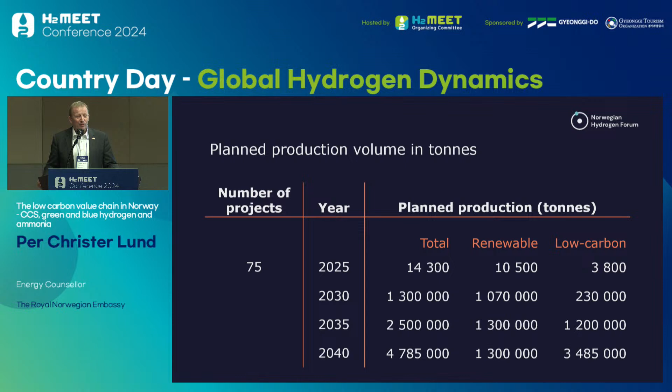And this is the elements that we can bring to the market. Our ambition is to be able to produce and deliver a substantial amount of green and blue hydrogen, primarily to the European market, because that is closer. And Europe is screaming for clean energy by pipeline or by ship or by whatever means.

Not only a class, but also an advisor, and they do testing, etc. All will be presenting later today. Just a few examples of projects that we have ongoing.

Yara is the global second largest producer of fertilizer in the world, and of course ammonia is the main constituent of fertilizer. They have a very ambitious plan to go green on their ammonia production as well, from green ammonia. This is one example: 400,000 tons per year of green ammonia in Norway.

Moving forward with that, they are about to build up a similar facility in Pilbara, Australia, where the export market for that green ammonia is Korea, or Japan, or any other off-taker in Asia. So this is a very strong driver for that ammonia production side.

The other one we have is in the very north of Norway. One of the challenges in the long-stretched country of Norway is transmission capacity, so quite a bit of the green electricity that we have now from hydropower, but also wind, is captured. One way of utilizing that is to produce ammonia or hydrogen for export to the continent. It's a far distance, so ship transport is key for this one.

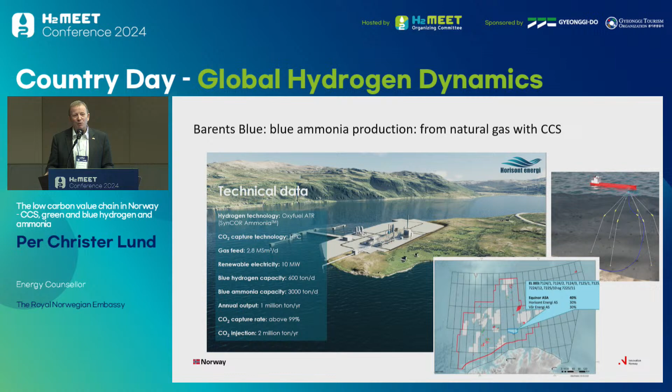This project was approved by the government last year, and it is a combination of producing ammonia from natural gas combined with carbon capture and storage back into an aquifer in the north of Norway. This is in the polar region, so there are many challenges when it comes to ship transport to facilitate operations in a tough environment.

We are also looking at the downstream side, replacing fossil fuels or reducing agents in our steel, cement, petrochemical, and other industries with greener fuels or greener ammonia. So this is one example: steel or iron production using green or blue hydrogen as the reduction agent. This is one of the projects there as well.

And of course the transport sector is important, the maritime transport first. Land-based transport may be coming a bit later, it looks like the wave of electrical cars in Norway has taken over from hydrogen cars. But for the maritime sector we have many initiatives, for example the Hydra ferry, which is the world's first full hydrogen-fueled car ferry.

And we have the Topeka project as well, which is a combination of hydrogen-fueled hydrogen transport vessels by Wilhelmsen. This Topeka project is also helping to distribute hydrogen, small-scale distribution along the long coastline of Norway to various sites. So much activity in that space.

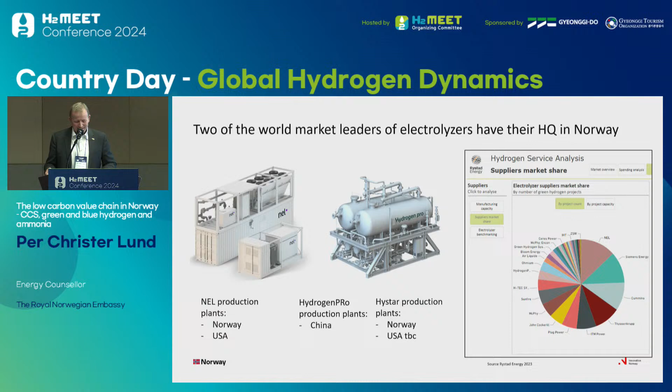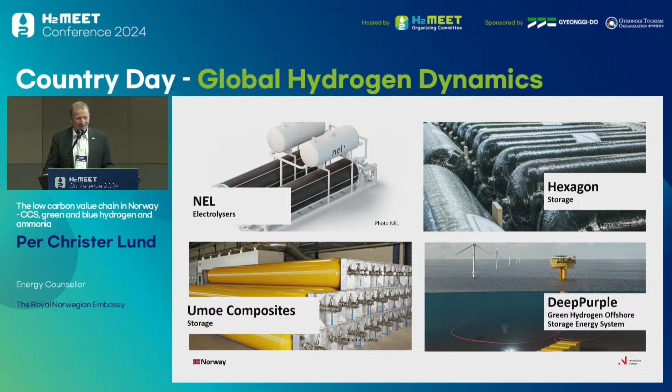We have storage, Umoe Composites is here, Hexagon, Lattice - sorry I didn't put that in, but he will present another concept for hydrogen storage. And then we have the CCS part.

I'll spend the last 5 minutes or so, a little bit more on the CCS part, because that is an essential part for Norway to be able to convert our natural gas into blue hydrogen - capture the carbon from the natural gas and then re-inject it into the seabed. Norway has been a leader on CCS projects since back in the 1990s. You probably heard about the Sleipner project, which was the world's first million ton per year re-injection into a saline aquifer under the seabed. And we have a number of projects now.

I'll go a little bit deeper into this one. So we are again building up not only a national value chain for carbon capture and storage, but actually a European and potentially a global one. That is, on the capture side, we are pushing forward with capture technologies from fossil fuel plants - coal power stations, natural gas power stations, oil power stations, etc.

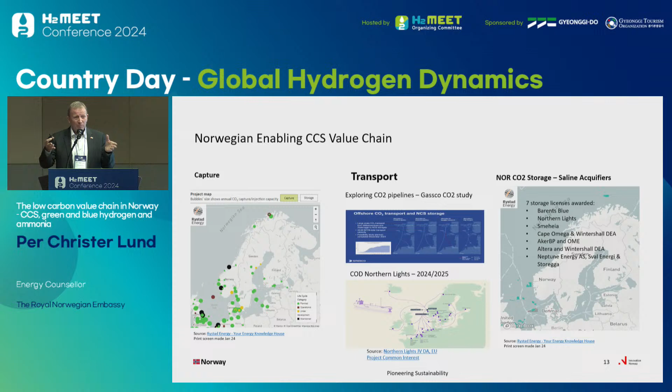But also cement industry, from waste facilities, etc. Transport on ships - we are also leading on CO2 building and contracting CO2 transport vessels. And then, of course, the major project in Norway now, the Northern Lights project, is about being a receiving terminal, not only for Norwegian CO2, but also from Europe, and then re-injecting it permanently under the seabed in the Northern Sea.

I don't have time to look into this. I'm happy to share this slide, of course, and talking. But we started in 1996, so we are leading in this CCS space.

We have one of the most advanced technology centers in the world when it comes to testing of large-scale capture technology, amine-based, at Mongstad, where we have a number of companies from the Middle East, even South Africa. Japanese have been there as a partner on developing the new capture technology - amine-based, ammonia-based, chilled ammonia-based, membrane, etc. So we have built up a very advanced center for this in Norway as well.

And then, of course, it's the Northern Lights project that actually started or is about to be activated now. The first customer for this - let's call it the CO2, this is a receiving terminal for waste, for CO2. One of the first customers is actually Yara. Yara is capturing CO2 from its ammonia plant in Netherlands.

The Northern Lights project has contracted 3 vessels to transport it from Netherlands to this receiving station. And then it will be treated and then re-injected or injected into a saline aquifer under the seabed in the Northern Sea.

Ambition large: 1.5 million tons starting this year, or building up, and then maybe up to 4 million tons per year. So we have the ambition. Norway has the ambition to be the waste receiving station of Europe.

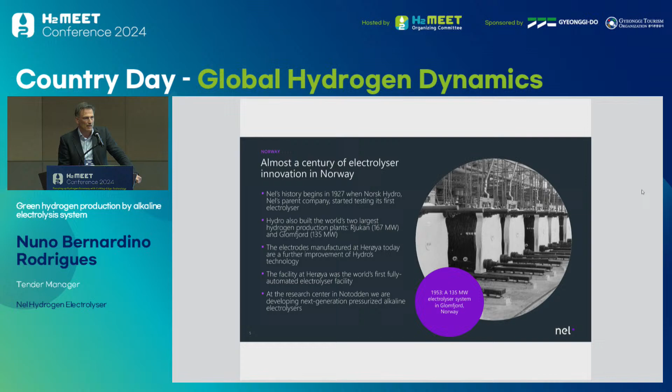So today in Norway, in Notodden, we still have a large research center where we are developing not only the next generation of atmospheric alkaline, but also the next generation of pressurized alkaline.

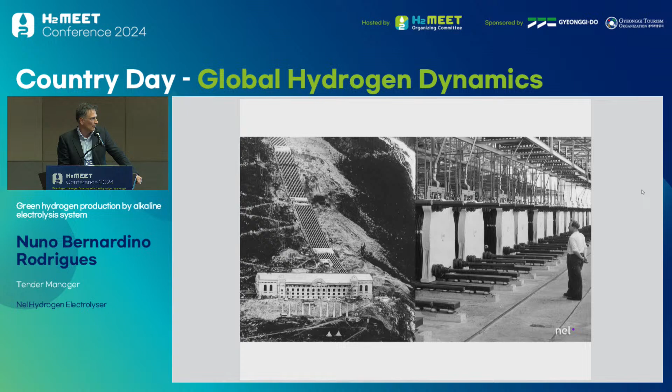So what happened at Rjukan? Rjukan is a quite famous place in Norway - I know some of you have been there. Rjukan was actually a 167 megawatt plant.

There were 6 floors of electrolyzers, something today we still struggle to build 2 floors of. Out of this came H2 for ammonia and fertilizers, and this was actually operating for more than 40 years. It is amazing how technology from the 1920s was used to build something like this.

And while today we are still looking into ways of doing this again. This was also a very famous site during the Second World War. Initially it was being used to produce heavy water.

So in the basement, we were producing heavy water that was being sent to France. This was actually a quite secret program driven to produce a nuclear atomic bomb.

What happens next? During the Second World War, Germany invades Norway and takes over this site. So they start using that heavy water and sending it to Germany.

So there was a strong program from the Allies to bomb this place, but it is in a very steep valley, so it was very difficult to reach. What they did was take a few very, very brave people and drop them in, and they had to travel several days until they reached the site and put a bomb in the basement.

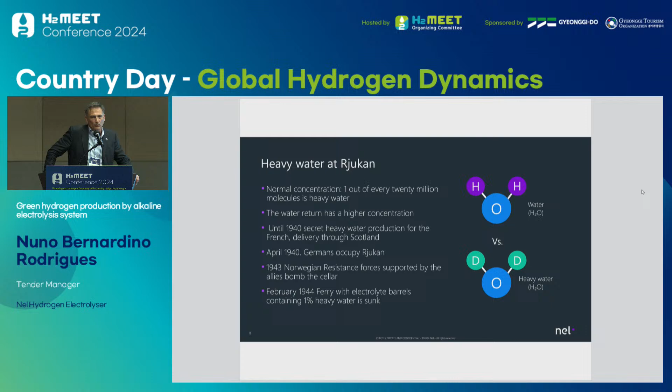And what they were doing in Rjukan, they were processing the water several times until they achieved the concentration required. It was a long process, and a lot of water was being shipped, which doesn't make much sense, but it was shipped all the way to Germany. After the bombing, there was still a lot of water to be sent to Germany, so the Allies also sabotaged the transportation. They actually sunk a boat not far from the Rjukan site, in a big lake, full of that water.

That building was actually demolished in '77, which is unfortunate, because I think we could still learn quite a few tricks from the building itself. But it's very interesting to understand how technology from the late 1920s was able to produce something that worked for 40 years.

One of the other biggest plant productions was in Glomfjord, in north of Norway. It's actually 135 megawatts, and it worked from the 50s up to 1988. And do you know why it stopped? Why did they stop producing hydrogen for ammonia in '88? Any guess?

Because a decade earlier, they started using natural gas. So Norway was producing green ammonia for decades, and then it stopped, so we went backwards. Of course, we know that the process is cheaper using natural gas. I think now we need to go back to the old times and use green energy to produce, to replace the gas.

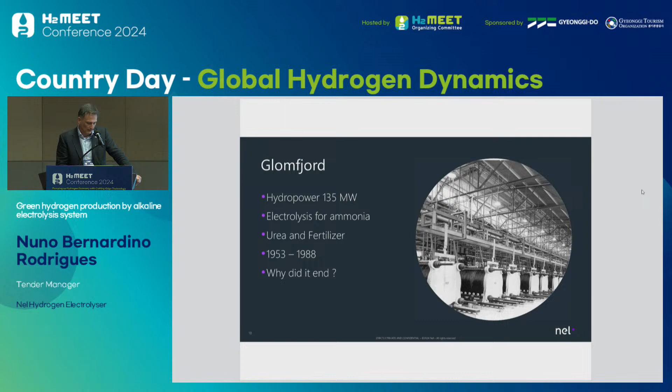I continue to click on the wrong button.

This is like, okay. I think it's important in linking to the old times that we need to remember the why. Our mission is to fight climate change in hard-to-abate sectors. We see that as a priority. There are many utilizations on the chemical and processing side for hydrogen, and it's really important to start with those.

So when Nel, or Nel's parent company, started, the objective was to produce fertilizer for a hungry world. But now we face a new challenge.

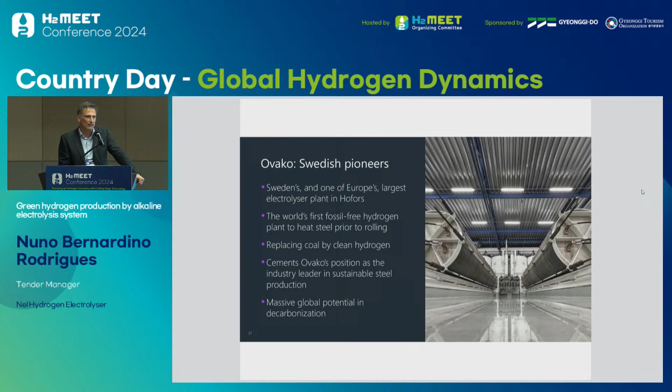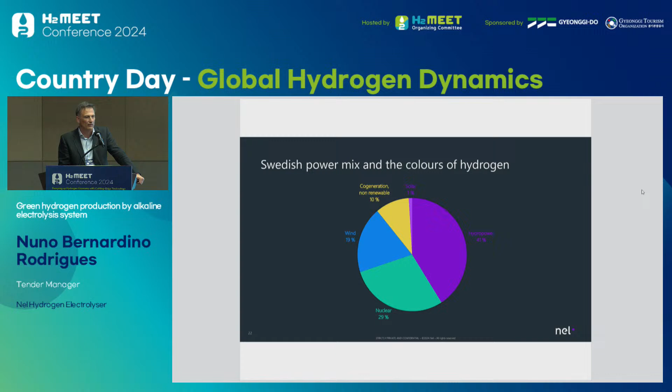Besides Ovako, they have the first fossil-free hydrogen plant, and they are planning to expand this. The steel industry by itself has a massive potential for decarbonization. Ovako is connected to the grid, and like in Norway, in Sweden the grid also has renewable sources, so even when using grid electricity they are still very much on the green side. We actually have a 25 megawatt facility in Sarawak, OCIM. What's very interesting is they sit on the other side of the world from Norway, but the technology is so reliable that they take care of the maintenance themselves, and we never heard from them again. It's very good though.

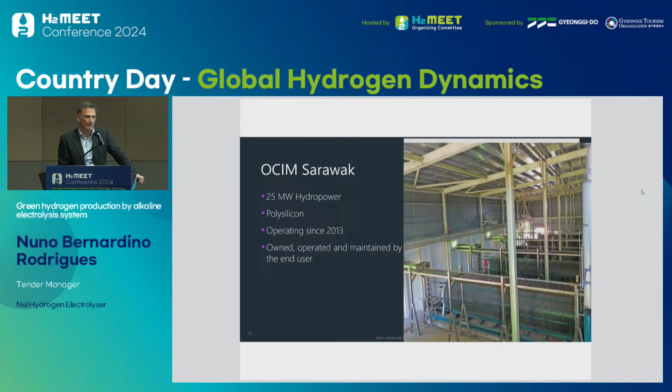Yeah, it's bad for the aftermarket though. We don't sell much aftermarket with these guys.

It's worth mentioning we have an ongoing project with a Korean partner, Samsung C&T. It's our first project in Korea, and we are very happy to partner with Samsung C&T on this. We will work together to make this a success, so we have high expectations, and hopefully this will be a starting point for many other opportunities in Korea and with Korean partners.

We also have projects in the US. We have H2OK ongoing, actually the largest project we are executing right now.

So let's summarize. Here you have a picture of the factory, I couldn't put many pictures since they need to be sanctioned by legal and corporate, so it's not the best picture, but it's what I could share with you guys. I think the key point on this slide is that we have a very reliable technology, and we are building that technology for the future. We currently have two platforms, PEM and alkaline, and we are developing a third one. We don't know which will be best for the future; what we know is we'll push all three in the same way and let the market decide. There will be some more advantageous in certain situations, and some will be the winners over the others.

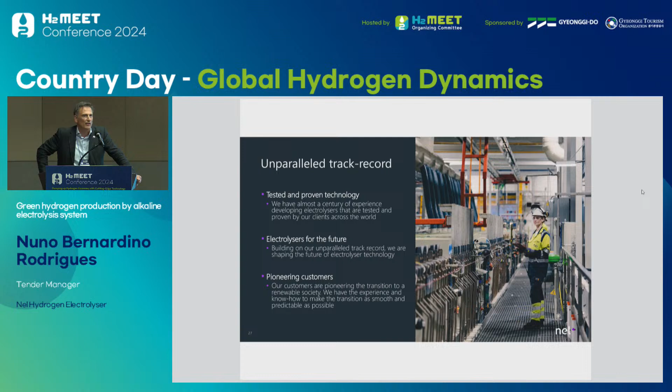And I think we can finalize by saying thank you to our customers. Our customers are currently the pioneers of this whole industry, and it's a big thank you for driving this. The world needs that. Okay, thank you.

I was planning to ask you, what is the future development in hydrogen production using electrolyzers? But I think you already mentioned it's PEM or alkaline. Are you moving into a third area, or is it secret? We are moving to a third - that's actually a very recent development. Up until three weeks ago I couldn't have said this, but we are developing a third technology: pressurized alkaline. We are also monitoring other industries and technologies, but currently don't have an active stake in those.

I'm not sure if it's a question or a comment, but Nel is also engaging in more of the hydrogen value chain, not only production but also distribution and filling stations - do you want to mention that? Actually, we have disinvested from filling stations, so you shouldn't ask that question. But you're asking about the frontier, right? The next frontier is not so much about technology - I think it's related to how to execute gigawatt scale plants that are cost effective and will serve the world. That's where we are sitting now, how to move from small, medium to large scale.

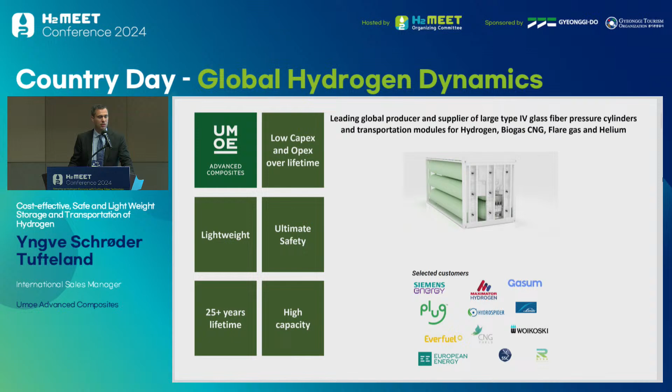What surprised me when I started in the hydrogen storage business is that, compared to other fuels, the storage of hydrogen—because of the unique characteristics of the hydrogen molecule—is complex and can be very costly.

Hydrogen presents challenges for traditional steel solutions because of the degradation it causes in the material. When hydrogen interacts with steel, it causes embrittlement over time, leading to weaker walls and increased permeation, so it can easily escape from the vessel itself. This is one of the challenges for the various solutions available.

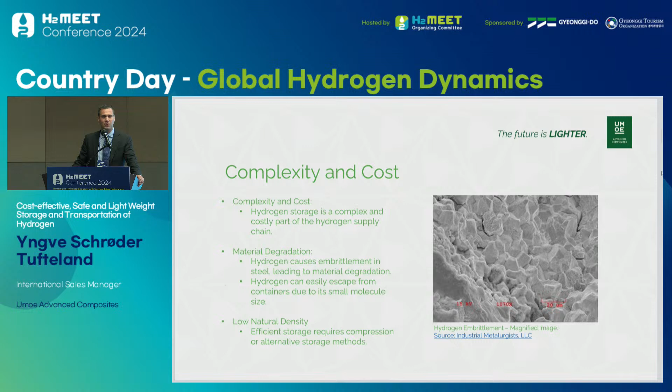Because of the low natural density of hydrogen, there is a need to compress it before storage, if you want to store and transport any meaningful amounts of hydrogen.

The compression technology itself is well-known and well-used, tested over the years, with increased pressure levels continuously being tested. For traditional steel solutions, typically the steel tubes you see on Korean roads operate around 200 bar, while the most compact or higher compressed solutions from our carbon fiber competitors can deliver pressure up to 1,000 bar.

However, the price for compression itself increases massively once you go over the threshold of around 450 bar. Every kilogram of hydrogen gets much more costly, and the carbon fiber tanks themselves can be very costly as well.

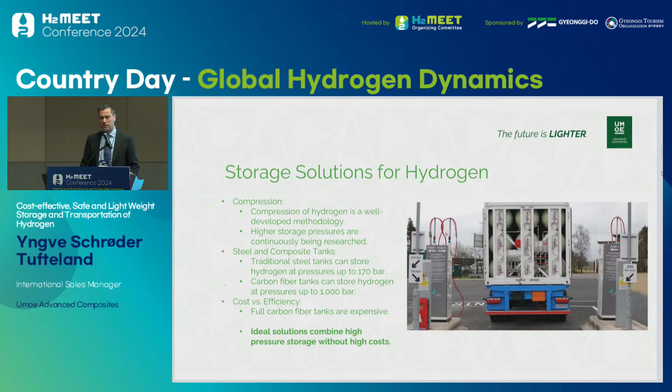Our mission and advantage in the market has been to propose a solution that balances a high pressure level—giving enough payload and effective handling—without the very high costs of the carbon fiber solutions available.

We have done some studies on this. Small disclaimer: this is only compared to Type 1 cylinders, where we know the price, shown in the red fields. This represents when you have small amounts of hydrogen transported per year over short distances—then yes, traditional steel tubes can still be competitive. But as soon as you...

As soon as you transport hydrogen over a certain distance and exceed a certain amount, as will happen now as hydrogen becomes more proliferated in societies, we can present a cost calculation where the total cost of ownership is lower using our solution compared even to the steel tubes available in the market now.

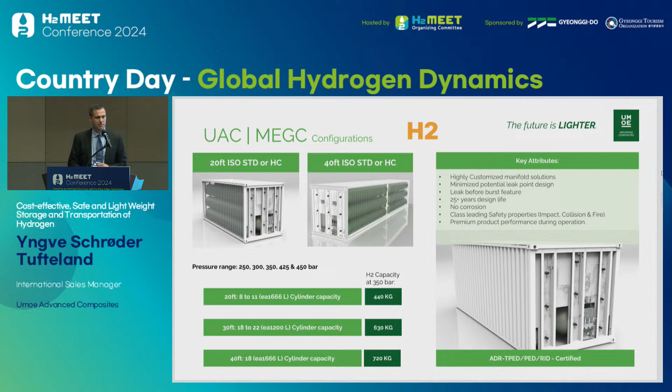So this is just an outlook of how the cylinders themselves are built up, with an inner liner using HDPE, a plastic that contains the hydrogen and hinders permeation. That is wrapped in a thick layer of glass fiber.

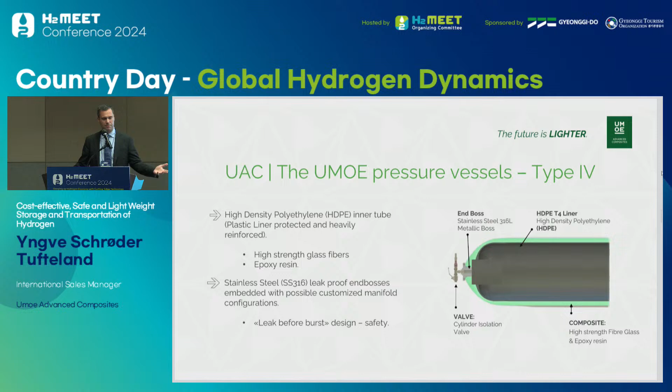With a developed system that we have called leak before burst, using a very thick glass fiber layer and leak-proof end bosses, even if the cylinders are subject to hard impact, fire, or explosion, the cylinders themselves will not disintegrate violently. After some time, or after a very hard impact, they might leak, but they will not burst like in an explosion.

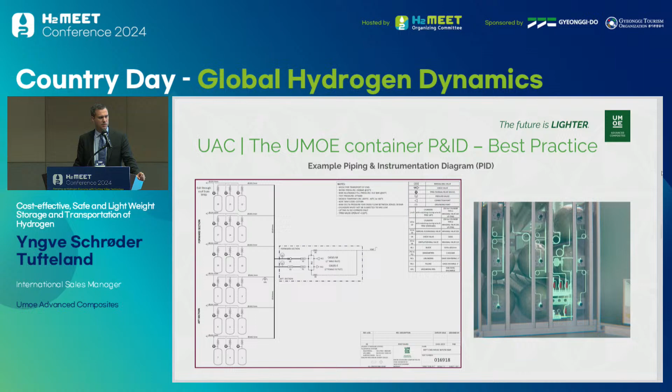Also, just an example of the instrumentation of the modules themselves. This, on the left, is an instrumentation of an 18-cylinder 40-foot container.

I wanted also to give you some examples of the customers that we are delivering to globally. We are based in Norway, and the factory is in Norway. We're also building another one in China, and our export share is around 95%. So we have delivered to around 35 countries around the world.

This is a project in Switzerland for our customer Hydrospider, which provides the hydrogen to the filling stations where the Hyundai Xcient trucks are filled in Switzerland using our containers.

Yet again, a similar project that exemplifies that our solution gets relevant from a rather limited size of hydrogen production. I believe it's a 1 megawatt pilot site in Norway, where our containers are used for the distribution of hydrogen. But as the hydrogen production plants get bigger, because of the containerized solution and high pressure, it's very convenient for scaling as well.

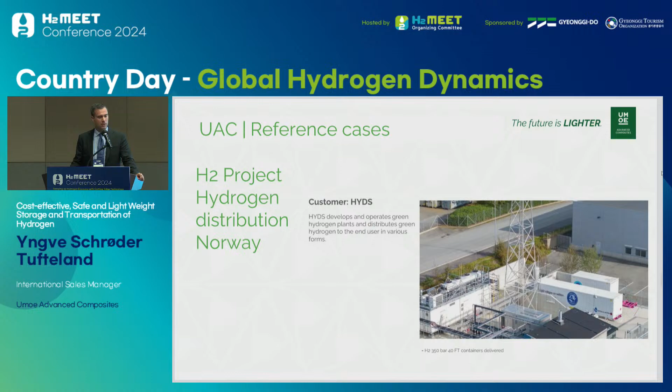So, and yet again, for distribution of hydrogen, this is in the UK, where our containers are used for the distribution of hydrogen from the production plant to the bus depot, where the hydrogen-fueled buses in London are filled.

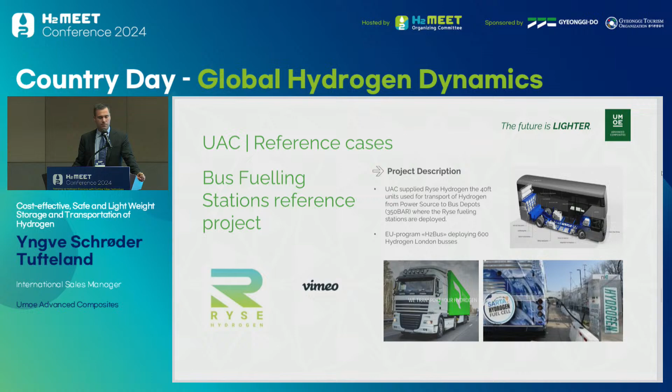And a few moments regarding the maritime industry, of course, since we come from Norway. We are participating in a number of the hydrogen-fueled ship projects that are going on in Norway right now. Some of these are still in the project phase, but they have been commissioned. The one closest in the timeline will probably be the retrofit of the LNG vessel, where the LNG fuel will be replaced by hydrogen using our containers as the fuel system for the ships.

And also, I believe it was also in Per's presentation, the hydrogen passenger ferry in northern Norway. That will be the largest hydrogen-fueled ship in the world when it enters service in 2026. And our containers will be mounted on top of the ferry, so that it will be able to run for 20 hours, something like that, before fueling.

And we see that our customers in the maritime industry, when they consider ship projects, energy density is an issue when they move to low and zero emission solutions. There have been a lot of progress in electric battery-driven ships in Norway during the last couple of decades. But batteries will only take you that far before the battery package becomes too large and heavy. And they're finding that compressed hydrogen can be the most cost-effective alternative for coastal intermediate routes, while liquefied hydrogen and ammonia-driven ships will be reserved for even larger distances.

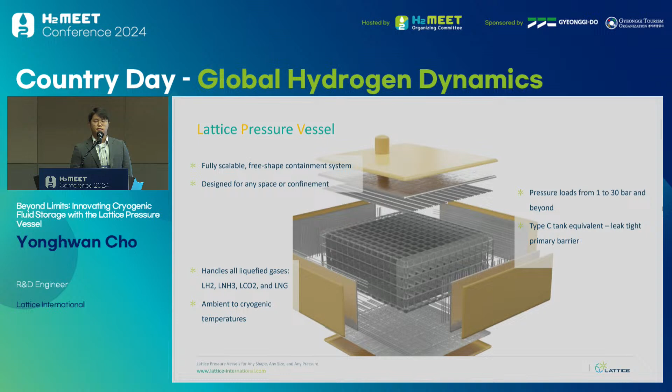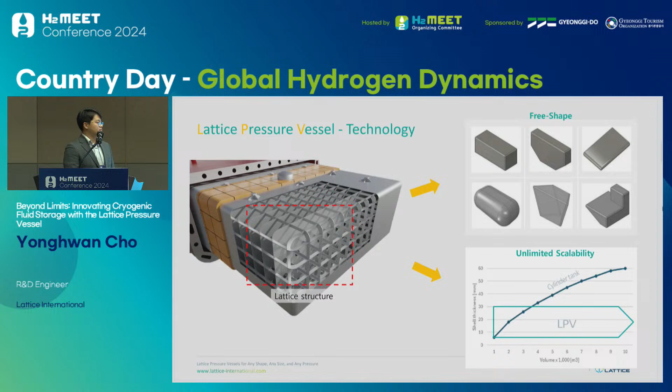So what exactly are the values of using LPV? First, its ability to design large-scale, medium-pressure vessels means it can store all types of cargo and give more flexibility in terms of storing pressure and temperature, while also being able to hold internal loads all the way up to 30 bars.

LPV typically gives enough holding time for most of its applications, so you don't have to worry about any reliquefaction units or boil-off gas. Also, because you can scale up the size, we can typically reduce the total number of tanks required, and that greatly helps with maintenance and reduces expenses on auxiliary units such as pumps, valves and pipings. Ultimately, it gives a chance to save in terms of OPEX by reducing the amount of maintenance required, and by carrying or storing larger cargo at a time.

The fact that LPV can have any shape we want greatly enhances space utilization, maximizing volume efficiency. LPV can be used for practically any application, starting from small scale like trailers and trucks on the road, all the way up to extremely large scale cargo ships and onshore storage tanks. Together, this gives a chance to save in terms of CAPEX of an overall project, because you can reduce the amount of land space required for any plant site, or reduce the size of the transporting vessel.

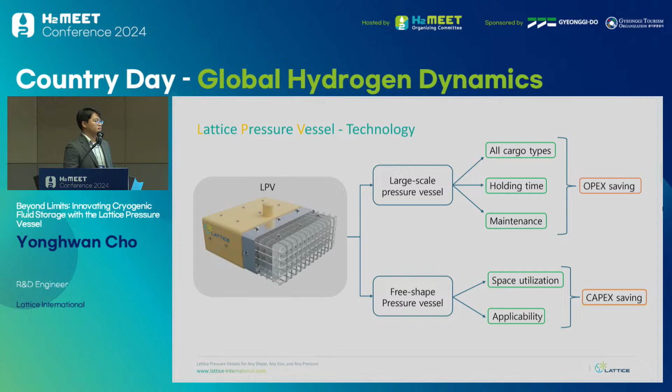So in detail, let's see what LPV can offer for different types of gas. For liquid ammonia, we know very well that it can be stored as a liquid at room temperature as long as the internal pressure is above 10 bar. This means that using LPV, we can store large scale liquid ammonia without any need for insulation. So whether the liquid ammonia is used as a fuel application or stored and transported as a good, using LPV we can offer the most volume efficient and easy to operate solution.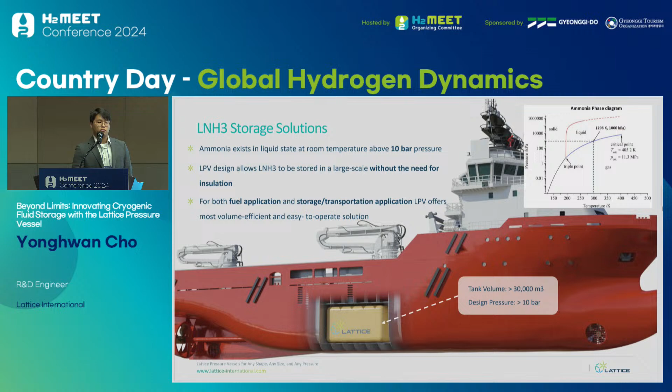Now, just to give you guys a little bit more detail, this is something that was made public just last week during Gastech. One of the ongoing projects, the main one we have right now, is with Samsung Heavy Industries, and we are currently working to build a 100,000 cubic meter scale floating carbon storage unit. In that particular ship, we were able to bring down the number of total tanks from 15 to 4 by using LPV.

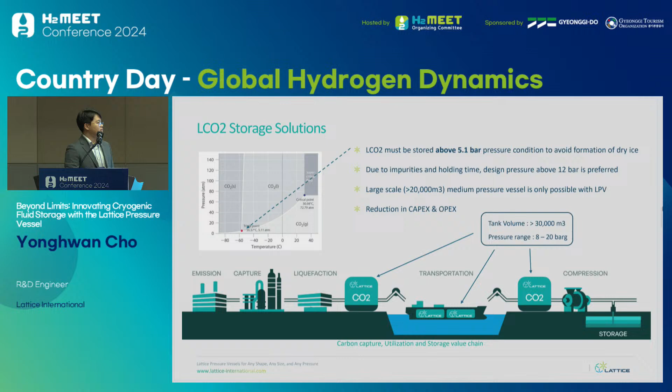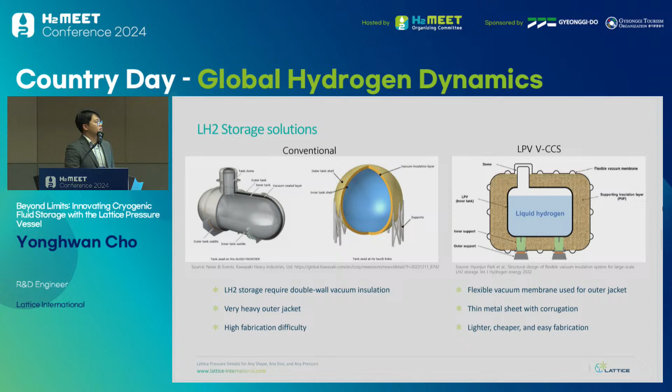This is the reason why we are developing a new insulation system called VCCS, which stands for Vacuum Cargo Containment System. In this system, instead of using a heavy, thick outer jacket, we are using a thin sheet with corrugation, and we can see how it looks at the bottom right corner. This particular design allows the outer jacket to contract and expand along with the inner shell without any change in its thickness or design.

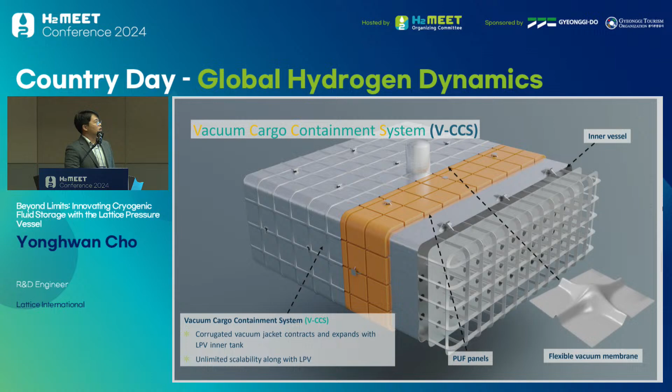So it can be scaled up along with the LPV while maintaining all the benefits of the LPV. There are polyurethane foam panels in between the jacket and the inner shell. If we take a more detailed look, there are 3 different layers, and they are installed by stacking on top of each other using glue.

On top of them, we have a vacuum membrane that is installed and joined together by a lap joint. This fabrication process is relatively simple, and we are expecting the total cost of installation to be about 20 to 30% of the inner shell. So LPV, together with the VCCS technology, can offer a large, scalable, and cost-effective solution for storing liquid hydrogen.

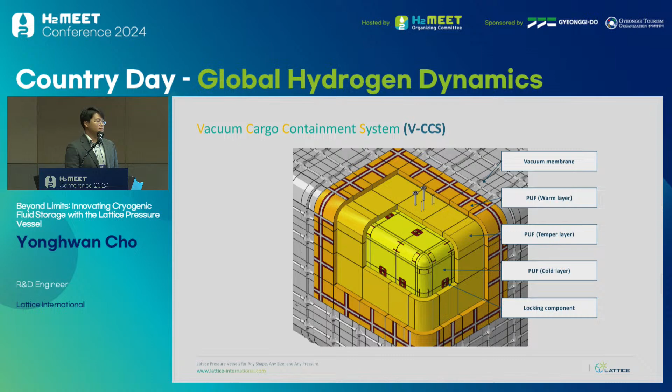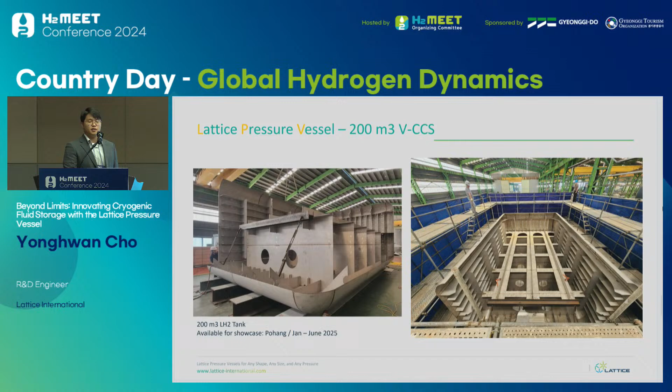In fact, we are in the process of fabricating a 200 cubic meter liquid hydrogen tank using VCCS insulation. The fabrication and testing of this tank is to be completed by end of this year and will be available for showcase through the first half of 2025 until June. So if you are interested, please let us know, and you can come check it out yourselves.

Lastly, I would like to demonstrate the use of LPV in a land application. When it comes to use of storage tanks on land, there are multiple important factors, but two that I'd like to focus on are the transportation part of it, and also the land utilization part.

Similar problem with spherical tanks, because spherical tanks, famous for their capacity, must be fabricated or assembled on site. So transportation is a real issue when it comes to spherical tanks, and also the manufacturing and fabrication of double wall large-scale spherical tanks are notoriously expensive.

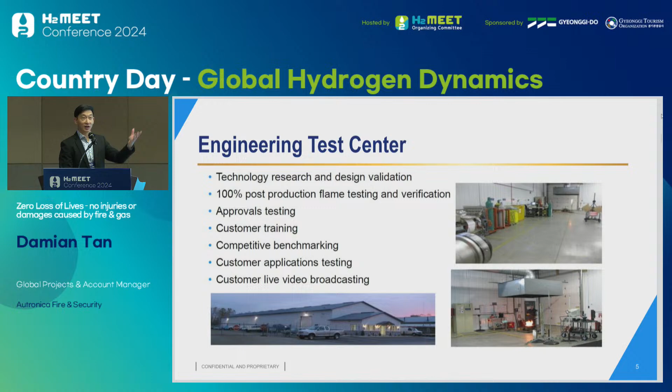So in Autronica, we provide the total solution, from design to execution. We have engineers that will execute the installation together with the client.

I think from DNV, just now I saw one lady asking me about fire and gas mapping. So we don't per se do fire and gas mapping, but we do get our engineers involved in the design with a client, and we assist them in the fire and gas mapping process.

So Autronica is actually a one-stop solution provider for our customers' fire safety, and we provide the solution. So we do have controllers.

We have fire panel control, just like any other fire alarm panel, but these are SIL 2, with the certification for safety integrity, which is required in most of the petrochemical plants that our customers are in.

And our controllers have dual safety. That means should one controller, or even the cables which are bi-directional, but even if one cable breaks, another controller immediately takes over. So you have full redundancy on the system.

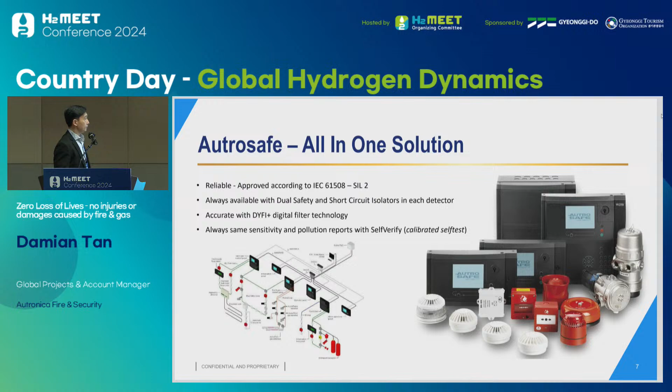So let me talk about hydrogen. Like I mentioned, hydrogen is something that is a part of our lives. Because hydrogen is a very flammable gas, we always hear, even in our school days doing science projects, everybody tells you hydrogen is so dangerous, you have to be careful. And it's true, it is very dangerous.

The reason why it's dangerous is because hydrogen is actually odorless, it's tasteless, you won't even know if there's a leak, you can't smell it. And the worst is that even if there is a fire, you cannot even see it, because hydrogen burns and gives out water rather than carbon. Most fires that you see give out black smoke, not hydrogen. You will not be able to see it.

Especially when there's a hydrogen fire, when you walk into a plant and it is high, you just see a shimmering, like you see on a hot day when you look at a bus and see those waves coming out - that's what you see on a hydrogen fire. And because it doesn't burn with any radiant heat, you won't even know until you walk right into it.

In many of our customers' process or petrochemical plants, what they do is they actually have a broom, literally a broom, and they sweep it across. If the broom catches fire, then they know there is a hydrogen fire in there. But of course, with the technology we have, we can actually see the fire and warn the customers.

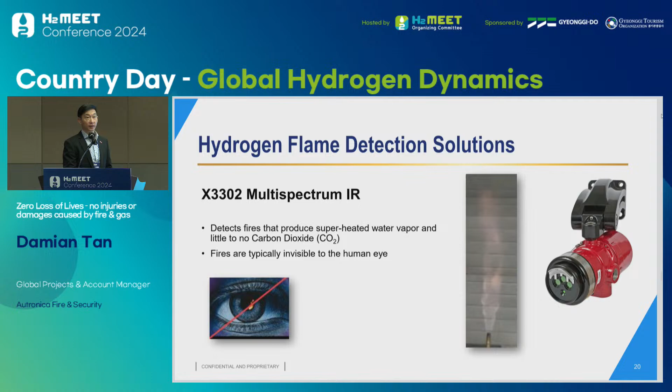As I mentioned, the difference in technology in UV-IR type, which currently most clients are using, is that in UV-IR the distance of detecting the hydrogen is very, very short - we're talking about maybe 10 to 15 meters maximum.

But with the IR type that Autronica has, you can look at the distance easily on axis - meaning if the flame, a flame detector is not exactly looking at fire, it's looking at the infrared coming out from the fire, being emitted by the fire. So when I say on axis, it's like I'm looking at you, but off axis, I'm looking at the side. So I can see someone walking in, but I don't see it as far as if I'm looking directly. So a flame detector works exactly in the same manner - it looks out for the hydrogen fire.

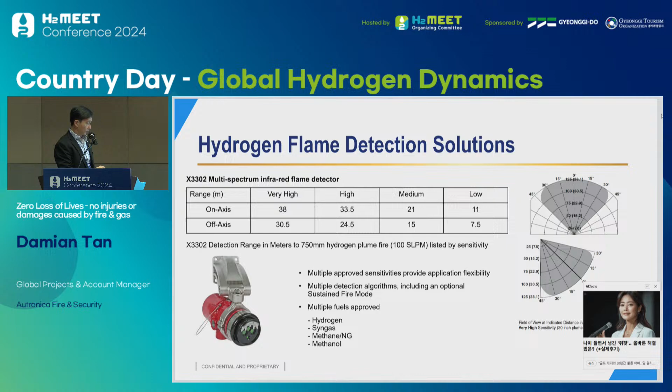As I mentioned, most of our detectors have their own self-check, all the features required. It has data logging also, which is a requirement for customers. Although these detectors feed back information to a central controller, locally it also has data logging. This aids in times when there's a problem with the detector - our service engineers go down, they can pull out all this information, and they can see what the detector saw.

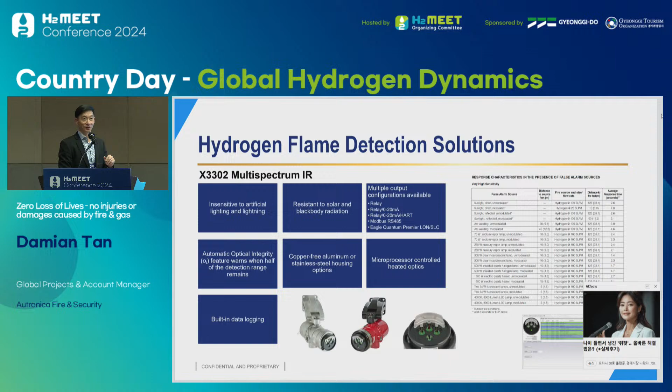And also we have for gas detection. So as I mentioned to you, when flame detector comes in, it's always the last stage of a gas leak. So we do have gas detectors that detect when there's a hydrogen leak. And that is important because hydrogen is odorless, so as a human, we will not be able to detect it.

In fact, if you look at the petrol used for cars, benzene, they actually add some deodorizer inside so that when you fill it, you can smell the petroleum in your car. Unfortunately, for hydrogen, because it's such a small molecule, even if you add any deodorizer so that you can smell that hydrogen is there, because hydrogen is so light, the moment it's released, it immediately floats up and gets diluted even before you can smell it.

And like I said, just a small percentage of hydrogen mixed with air can cause a very bad, catastrophic explosion. So we have the gas detectors, we call these the catalytic bead detectors, and these are used to detect hydrogen. Currently it's used to detect any type of combustible gases, but nowadays we have other technologies like infrared to detect combustible gases. But infrared can only be used for hydrocarbon gases, unfortunately not for hydrogen. So for hydrogen, it's always catalytic gas detectors. Things like battery rooms use this kind of catalytic gas detector.

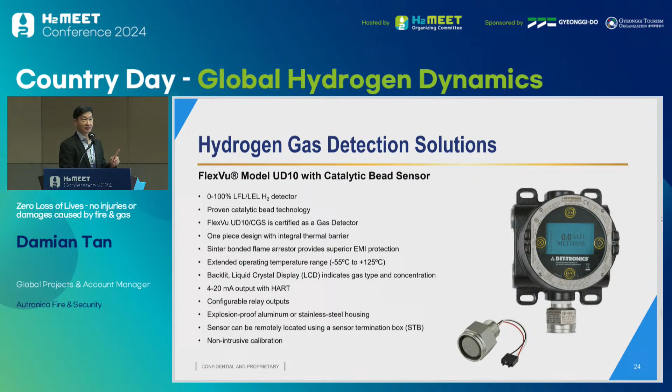And we also have hydrogen gas detectors that detect at the ppm level. At ppm level is very, very low. If you look at the previous slide, we were detecting at the LEL level, which I mentioned, 4%, so we are detecting at the explosive level, and 1% is 10,000 ppm. So if you look at the electrochemical type, we are actually detecting anywhere from 0 to 1,000 ppm. So this is detecting the hydrogen leak at a very, very low concentration. This is the second type of detector that we have implemented for our customers.

And the third type of detector is very special. It doesn't smell - what it does is that it listens. It listens to any high pressure leak. And if any gas that is leaking is at high pressure, it will emit an ultrasonic sound, which you and I will not be able to pick up. And in a plant, it is so noisy that even if there's a leak, no one can pick it up.

Most of the time, the customers will see a white cloud, then they know there's, for example, methane - then they know, oh, there's a leak. But for hydrogen, you cannot see that, right? So for hydrogen we use what we call the ultrasonic gas leak detector to listen for a gas leak.

And it has a very wide coverage, up to even 28 meters in diameter, so one detector can cover a very big area. For hydrogen applications, we usually recommend customers include one of these detectors because it detects even the smallest leak - even if the leak hole size is 2mm, and the pressure is about at least 10 bar, these detectors will pick it up even at 28 meters away.

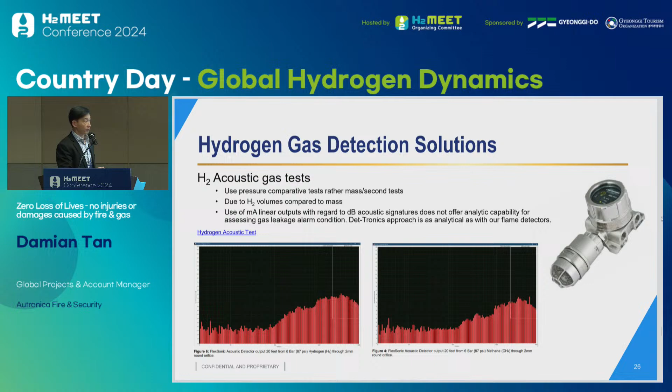So it's just like a human. Okay, but all these things will be fed back to a controller, which we also provide for our customers. So we have system solutions where we can link up all our detectors to all these controllers, or fire alarm controllers. These fire controllers will have the cause and effect that we design together with the customers, and they can use this to mitigate the potential of a hydrogen hazard.

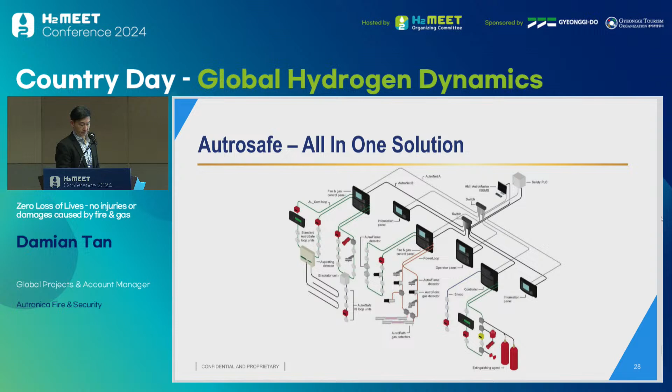So hydrogen and ammonia has been used in industry in many applications for ages, and there has been mishaps and accidents. But going forward, it will be more widely used in daily applications, everything from filling vessels to household applications and mixing in city gas. Do you foresee, I mean that's where the human error accidents happen, when non-technical skilled engineers and others are operating that, when me and you are filling our hydrogen car at the gas station. Do you see that the number of accidents by human error will increase, and also increase the need for your sensors and systems? Yes, okay, good question.

First, the two gases, one is ammonia and one is hydrogen. Ammonia, I guarantee you can smell it, but if it comes in a very high concentration, your nose becomes desensitized, so you can't smell it. But many times, most people can smell it - it's a rotten egg smell, right, or like H2S, a very heavy, pungent smell. And ammonia is very toxic when it's at a high value.

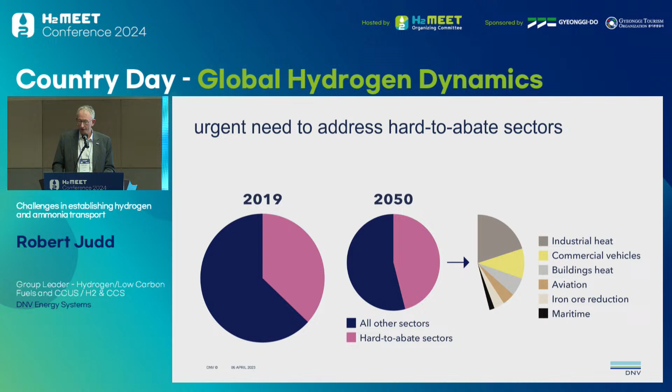And there are a number of barriers that we need to overcome. First of all is the cost, of course. We hear that hydrogen is expensive. How do you persuade people to use hydrogen when it costs more than the fuel they're using at the moment? And that kind of brings us all the way around the loop in the end, because how do you define that cost and how do you make that affordable?

What policies do you need in place to make it affordable? Demand and competition, there's a lot of competition between hydrogen and other decarbonised fuels. Renewable electricity, of course, is the key one, but there are different production methodologies for hydrogen, and all of them are potentially competing against each other in the value chain. Which one is best is not just a function of where you are, but a function of when you are, because these things change over time. Electrolyzers will get cheaper, there will be more potential for carbon capture in the future. These are nascent technologies, and some will win in some cases, but others will win in other cases.

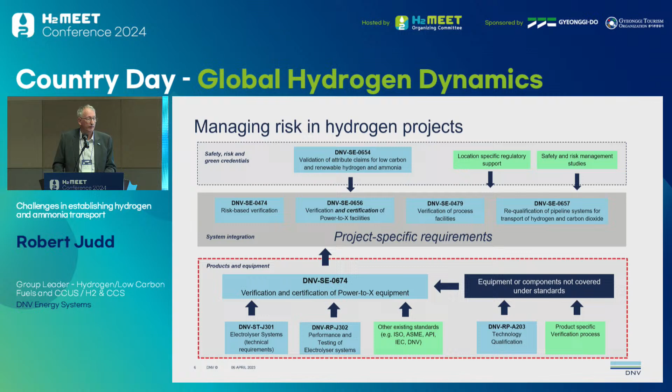So that's just a summary of the suite of risk-related products or specifications that DNV is working with. And you'll see on the right that the repurposing of pipelines is also an area we're very heavily involved in - I'll say a little more about that later. We do have a service specification looking at how you will repurpose a pipeline for CO2 or hydrogen use.

Going back to Singapore, the Singapore roadmap requires the use of 50% hydrogen in power generation, or suggests there will be 50% hydrogen in power generation by 2050, with a lot of use in other sectors too. There's a lot of ammonia that could potentially be used in the maritime sector. Singapore bunkers, I think, 20% plus of the world's maritime fuel, and when that decarbonizes, that's a huge potential lost market for Singapore, so it needs to understand how that's going to happen. Ammonia is not only potentially a fuel for the maritime sector, but could also be a power generation fuel.

So Singapore currently has a Pathfinder project, which is at the RFQ stage, and two consortia are leading the way on understanding how you would establish an ammonia supply chain for a 40 megawatt power generation project, but also for bunkering for maritime fuel and maritime purposes.

So the issues really are looking at things like LCOA, the levelised cost of ammonia, levelised cost of hydrogen. How do you optimize cost? How do you develop the infrastructure for ammonia and hydrogen? And how do you ensure safety? We have very large volumes that we need to transport.

We need to make sure that, if you go back to a country like Singapore where space is very limited and there is very high density population, it's very difficult to run new pipelines across a country, or transport or store these commodities in a country which is actually very densely populated. So you need to ensure the safety criteria are met.

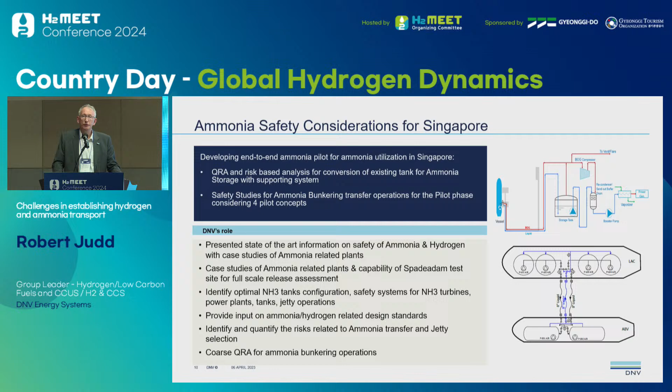So that was the start - can you really use ammonia? And then, can you store it? And can you bunker it? In work we've done for other clients, we've looked at the potential for storage of ammonia in Singapore, looked at specific sites, and done risk assessments on those sites. We've also assessed the potential for bunkering, both ship-to-ship and ship-to-shore, coming up with the optimum configuration and optimum sites. So basically, you can bunker ammonia even in an environment like Singapore where there are clearly space constraints.

Finally, another piece of work that ended relatively recently - there's the first dual-fueled ammonia ship, the Fortescue Green Pioneer, which DNV was involved in for the QRA, ensuring a site could be selected for fueling and, with input from the Major Hazard Department and the Maritime and Port Authority, ensuring we could select a site for commissioning that was effectively safe for bunkering. That bunkering study followed on from other work we'd done for the Global Centre for Maritime Decarbonisation, where we were able to understand and mitigate the risks of bunkering ammonia within Singapore. These are applicable beyond Singapore, but it's notable these projects are moving forward very quickly there.

Going back to pipelines - when we talk hydrogen, we're likely to be transporting through pipelines, although high-pressure composite vessels will play a major role too, but at the end of the pipelines more likely. There will be a need for repurposing pipelines, and we do a lot of work with clients looking at repurposing network readiness, covering everything from integrity assessment to safety, equipment, operational assessment, and looking at capacity issues, because the energy density of hydrogen is significantly less - 3 times less or more than natural gas.

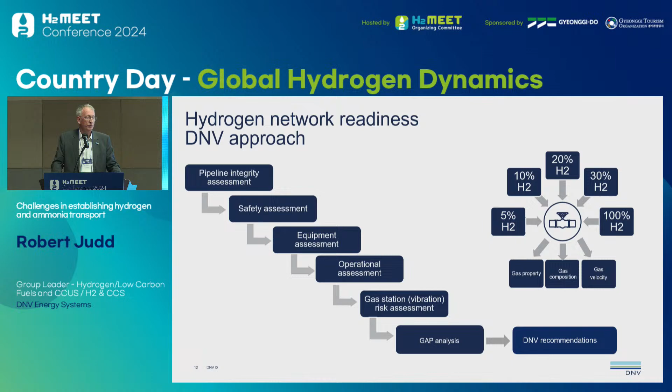We can go through the whole process of looking at your existing network and repurposing, coming up with recommendations for how that repurposing would occur, for anything from 5% hydrogen all the way up to 100% hydrogen.

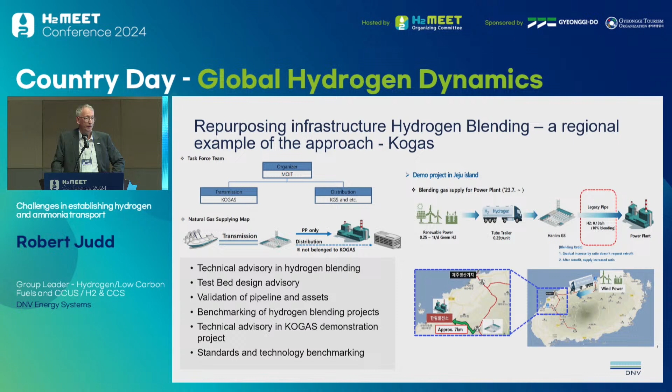And just a Korean example - we are working with KOGAS, and have been for the last 2 years, to help KOGAS understand how they would repurpose their existing network to blend potentially up to 30% hydrogen, with the idea that ultimately the hydrogen blend could be fed to a power station, alongside potentially a 100% hydrogen network, which would allow you to take that percentage blend even higher within those power stations and ultimately up to 100%. So that's something we're doing in Korea.

Back to Singapore, and this kind of starts to bring things together in terms of what the ultimate regulatory and technical requirements are. We're working with the regulator on a project we started this year. It's one of the biggest projects we've done in the hydrogen space in this part of the world, helping them understand the implications of taking their existing network towards a more diversified gas network, both for different LNGs and for blends of hydrogen, and what that would mean for their power generation fleet, and how you'd take that fleet from where it is now to where it needs to be.

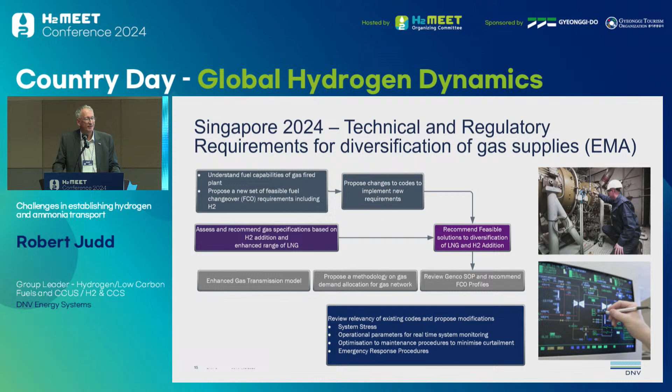What regulations you would need to change - for example, fuel changeover is a major issue when managing a power generation plant. If you lose access to your existing fuel, how do you change that? Fuel changeover requirements will change as you introduce hydrogen, and the survivability of those GenCos, those turbines, will change. All of these issues rolling into one will help us recommend to the Singapore government what changes they need to make to regulations, infrastructure, network planning, emergency procedures, and maintenance procedures - the real implementation of hydrogen in an existing network, and potentially whether there's a need for a second, new hydrogen network - and there probably is. These regulatory changes and requirements are key to making things happen.

Back to the GenCo side of things - we've also done work, not in Singapore but in Southeast Asia for a GenCo, looking at the real requirements for an existing fleet. What does hydrogen ready mean? We hear a lot that turbines are hydrogen ready, but they're not really, not straight out of the box. You need to do a lot of infrastructure changes at the turbine to make them hydrogen ready. They can be, but what are the risks of doing that? From an infrastructure point of view, what would that cost, how easy would it be, and can we realistically do that? What would you then need to do to upgrade to a higher hydrogen percentage? Realistically, most OEMs won't say you can go to 30% - they'll say 5% at the moment, but if you do this, you might get to 10, 20, 30%. Every OEM has a different story and reason for that, and understanding that at an individual level is really important.

We've done this work, and I think this is very applicable to Singapore, and potentially also to Korea. This is a very important way of taking forward the potential for hydrogen in power generation.

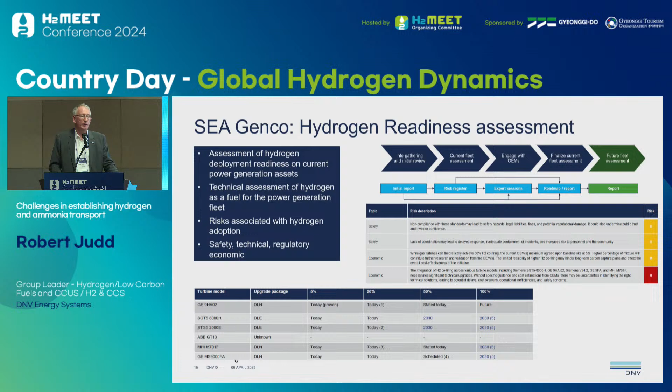Finalizing this, coming back to Singapore - there are many choices Singapore has to make. Does it repurpose its pipelines or use new pipelines? Does it blend, or go straight to full hydrogen or ammonia? Does it phase things or do everything concurrently, which is very risky? Do we have centralized or decentralized infrastructure for production and use? Single carrier versus multi-carrier - we hear lots of potential options for hydrogen derivatives, and we haven't mentioned ammonia yet - do we crack ammonia, or can we burn it directly?

The challenges are that the energy capacity of existing infrastructure will change because of hydrogen's energy density issues. There are real space constraints - storage requires a lot more space than LNG. Technology readiness levels are very low relative to LNG for hydrogen and ammonia, particularly for cracking technologies, but they're coming along quite quickly. And of course, the safety requirements and risk contours are very different and need to be assessed on a case-by-case basis. These are the kinds of challenges that need to be addressed.